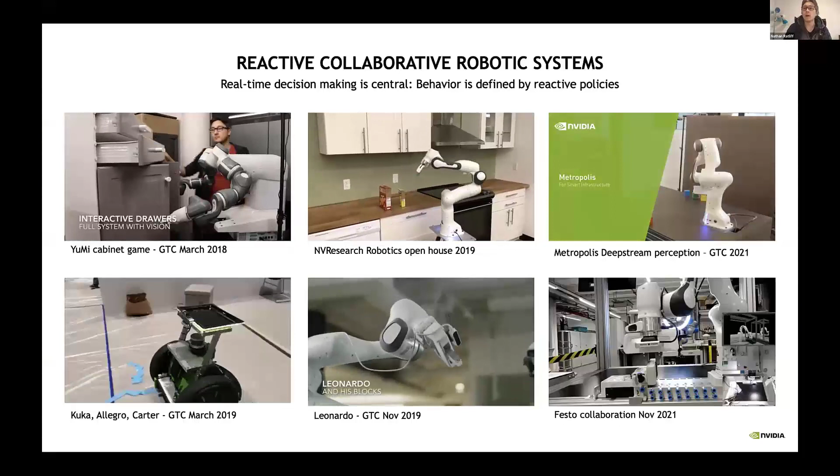Okay, so do you see the panel on the side? Is it blocking the screen? No, it's fine, it's fine. Okay, cool.

Over the past 5 years, I've been at NVIDIA, started off in research, now pushing into the product area of trying to productize some of these things into what we call Isaac Cortex, which is a collaborative robotics framework for developing systems on top of the IsaacSim tools and Omniverse. A lot of this research came from the Seattle Robotics Lab, and we're still continuing to develop it. What you see here is a series of demos that we gave in the collaborative robotics area.

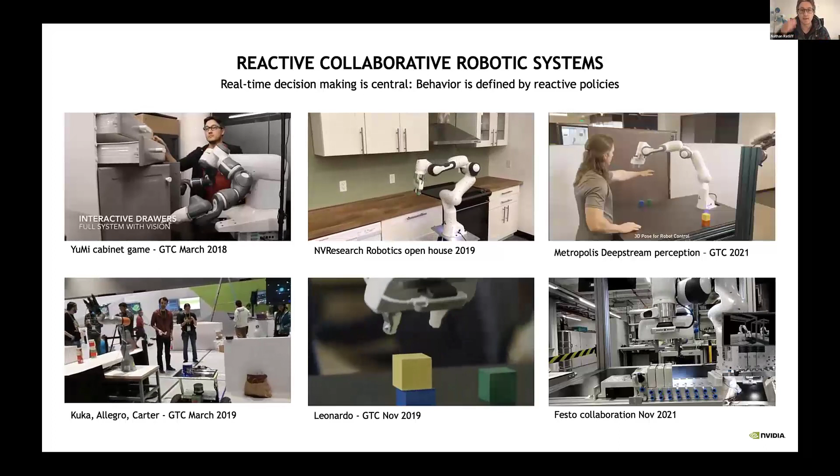Reactivity and real-time processing, reactions, state estimation, adaptation, and stuff like that are all critical because the world is constantly dynamic. Things are happening - even your estimate of the state is changing based on the current changes in the belief and the information that you have. So these systems that we develop are fundamentally reactive.

What I'm going to be talking about today is some of the underlying technology for developing policies for continuous control that are both expressive, programmable, can be trained, and can contain a lot of information. That's the real crux of all of this stuff.

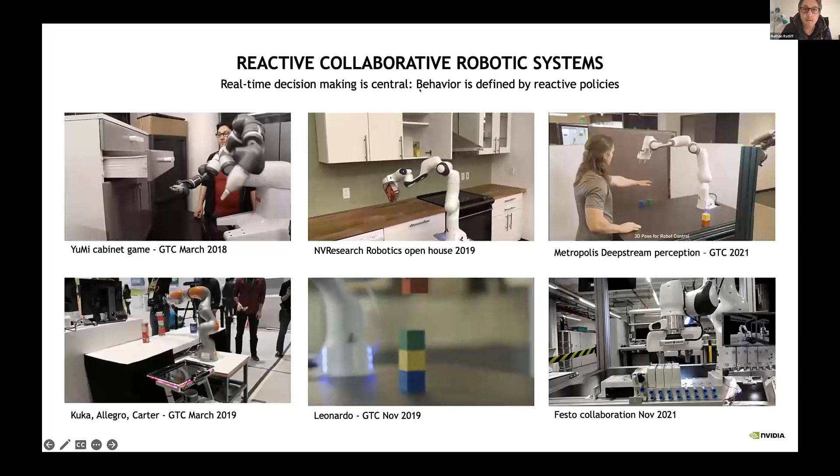One of the perspectives that I've started moving toward over the last year especially has really been shaped by this monograph that Bertsekas put out last year, and I want to point everybody toward it. It's really kind of transformational in the way I think about this stuff theoretically. This monograph is Lessons from AlphaZero.

He looks at the history of dynamic programming and reinforcement learning and what's worked in systems, especially case studies like Tesauro's backgammon program and AlphaZero. What he shows is that these policy iteration algorithms, especially the type that AlphaZero employs, where you do forward search on top of this actor-critic network to create better actions and better value estimates, and then project that data onto a class of actor-critic networks - that's actually running Newton's method on the Bellman equation. This theory spans discrete actions, discrete spaces, and continuous action, continuous spaces, and kind of the entire spectrum of abstract dynamic programming.

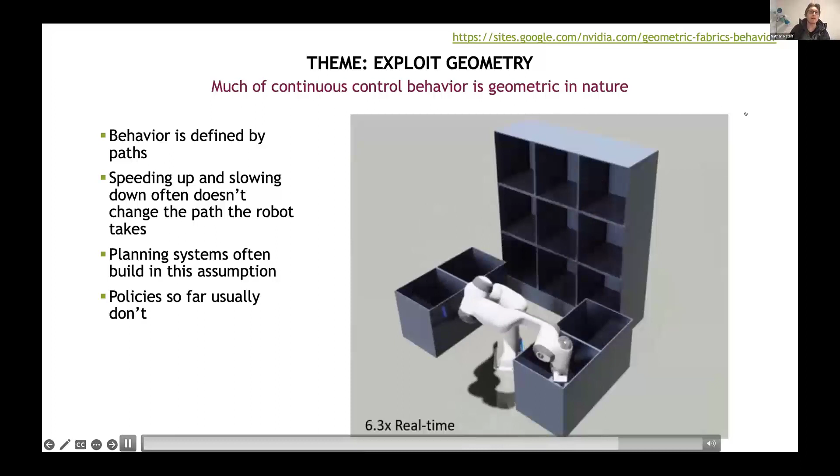The theme is that we're going to exploit geometry, and our hypothesis is really that much of continuous control behavior is actually geometric in nature. From what you see here, you can kind of see what we mean by that.

Moving between these cubbies, it moves between paths that are geometric in the sense that you can speed up and slow down the system, and the basic path that it needs to follow to move around these cubbies and into and out of them shouldn't really change. The behavior of the robot is largely independent of the speed that it's traveling.

So there's this network of paths that's defined by both the robotic structure and the environment around it that really influences the robot's behavior. That's what we're going to be building out and exploiting here.

And that sort of observation has been used quite a bit in planning systems. Most planning systems, if you run an RRT and then smooth it and so on, you often get not a trajectory out, but a path, which is just a series of points that the system has to go through.

Then there's a separate retiming phase where you actually speed it up and slow it down along that direction of motion, along that path, creating a particular velocity profile for following it. But you can choose any sort of velocity profile you want—speed up the robot, slow it down, make sure it doesn't jerk too much. That's independent of the actual path generation problem.

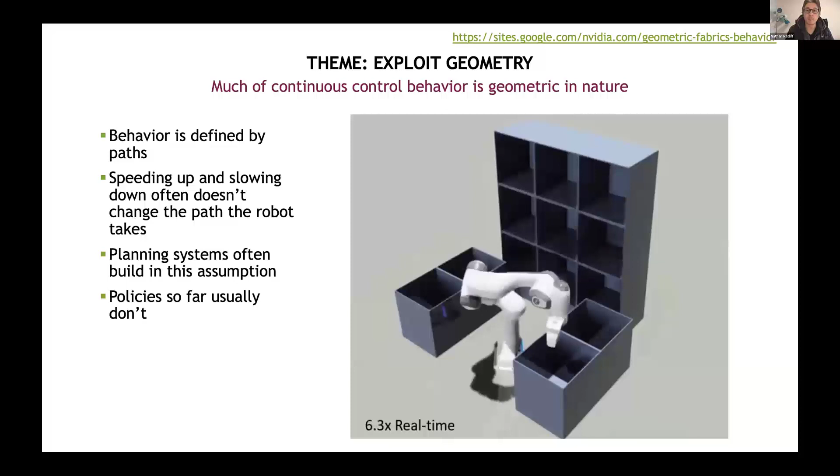So far, planning systems have done that to generate single trajectories or single paths and then turn them into trajectories, but typically policies don't represent their behavior in the same way. You can see from this anecdote of moving between the cubbies that this notion of following paths, and representing behavior as a series of paths affected by the environment and the robot's kinematics and constraints, is something we might be able to exploit as an important inductive bias.

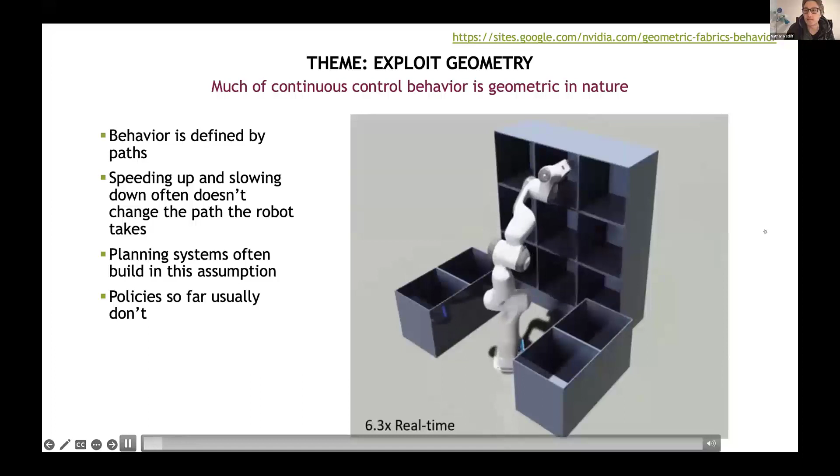So how do I get there? We go. Okay, so that was the little introduction.

The rest of the talk covers three main sections. One is describing geometric fabrics, the structure I've been describing of how we can exploit geometry to represent behavior better. Then I'll talk about particular mathematical tools for exploiting the structure of these things, which play into how we design real-world systems leveraging this theory. Finally, we'll go into what we call neural geometric fabrics, a way of representing geometric fabrics as neural networks, leveraging the inductive bias of geometry and the structural tools from section two to create structured policies that are both flexible in representation and extremely data efficient because they exploit this geometric prior.

One note: some of the stuff here is fairly heavily mathematical, so we have background material you can look at, including lecture notes I made on the geometry of smooth maps, some notes published in ICRA on generalized nonlinear spray geometries of paths, and Finsler geometry that leads to geometries of paths, as well as the geometric fabrics work. I encourage you to take a look at that background material. If you're not following the math right now, just focus on the intuition, which is actually fairly visual and straightforward to follow, I think.

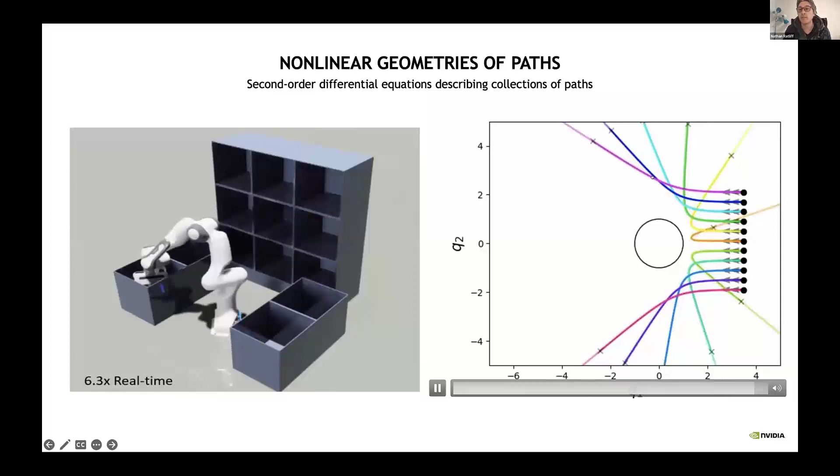And you can see that despite one of them moving more slowly, they both always follow the same path. And so that's the notion of geometry. It's independent of how fast you're going. The path that the system travels along is entirely defined by the initial direction.

And we can get some intuition for what are the requirements on a differential equation to have this property of path consistency by looking at just the nature of finite differencing and how velocities and accelerations differ from each other.

So if we look at a curve here and look at 3 consecutive points and say that they're separated by delta t apart, we can take finite difference estimates of the velocity and acceleration for these things and write out what the equations would be. This is just the finite difference velocity. This is the finite difference acceleration here.

And one thing you notice is that the velocity depends on 1 over delta t, and the acceleration depends on 1 over delta t squared right here. And so we can ask, like, if we speed up the system by scaling the velocity by lambda, how does that affect the acceleration if we want to stay along this path?

We just do a little algebra, move the lambda over to the delta t, or I just combine it with the delta t, and then plug it into the acceleration, and we see that if we scale the velocity by lambda, then the acceleration has to scale by lambda squared in order to stay along the same path.

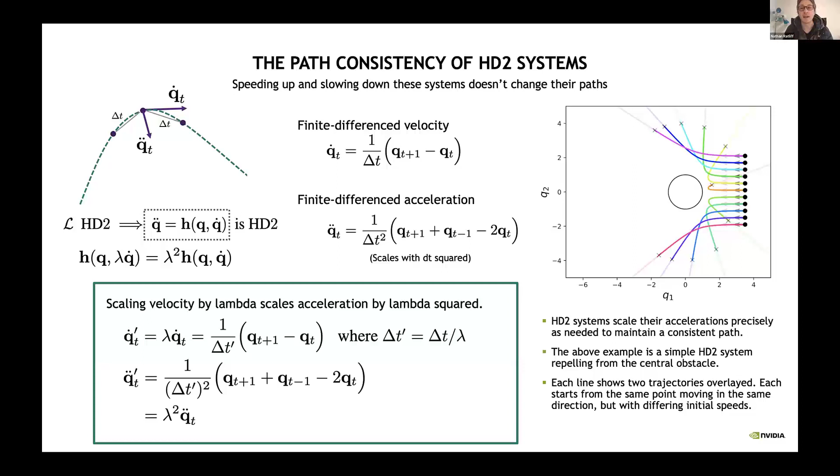And what we'll do is construct differential equations by just giving them this homogeneous degree 2 property and then speeding them up and then slowing them down in the right way to conserve some energy. And that energy conservation thing is what we see here.

Kind of the second part of constructing one of these things is choosing an energy. So here I write Finsler energy, and in the paper we wrote about nonlinear geometry and Finsler geometry, we kind of define what that is. But for these purposes, you can think of it just as like any classical mechanical energy.

That energy comes with its own equations of motion, just like classical mechanical equations of motion are derived from classical kinetic energy, using the Euler-Lagrange equation. So if you start with some energy that you want with a corresponding equation of motion, you can derive specifically how you might speed up and slow down along the direction of motion in order to make this system conserve energy.

We have some theorems and formulas around that, and we call it energization of the system. So if we write down any homogeneous degree 2 differential equation, which has this path consistency property, and then energize the system so that it conserves a measure of energy, what we end up with is this nice differential equation that has the same set of paths, because we're just speeding up and slowing down along the direction of motion, but it has this concrete measure of conserved energy, which means that any system running over the top of this, if it does nothing, is just going to conserve the energy.

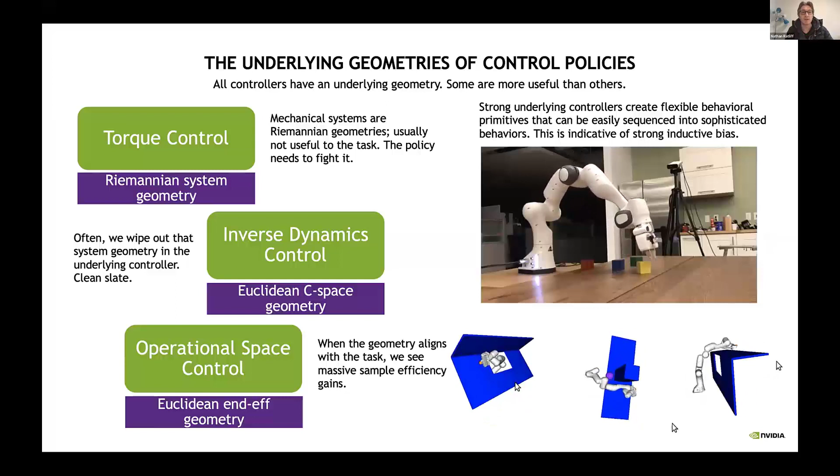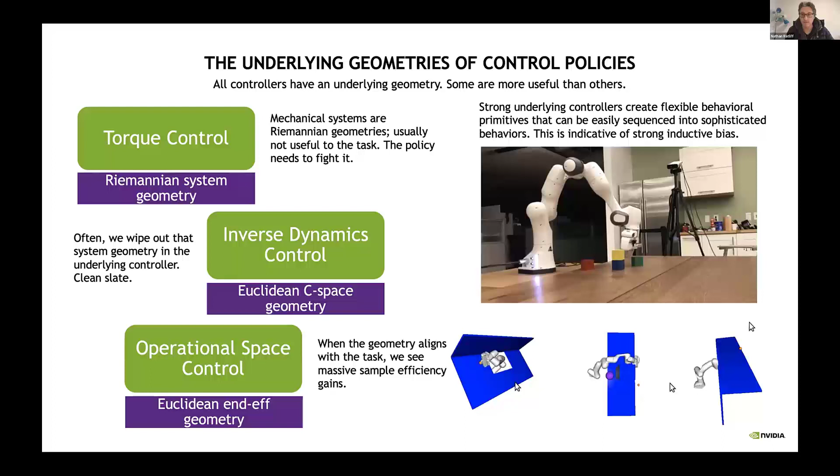On the bottom, you see an optimization system running over the top of some of these geometries, where we literally just optimize a single waypoint that it wants to go through. So we can do these longer horizon planning-based tasks, and the optimization converges really fast. It's stable, and it's able to leverage all of this underlying geometry.

So I mentioned a big part of this is forcing a geometric fabric, building a policy over the top of one of these road networks of paths, so you can actually get the system to accomplish a task. This is just a visualization of that based on the example from before.

What you see here on top is literally the road network of paths that come from the geometry. So here we start from this point, we shoot out a spray of integral curves. These form a series of paths that the system wants to follow that are independent of the speed it follows. They tend to move around obstacles, get attracted toward the point, but they don't slow down the right way. They don't exactly hit the point, they just kind of loop around, because we're just looking at the basic underlying geometry.

The system wants to be attracted to the point, wants to avoid obstacles, but it doesn't really have the goal in mind. By placing a very simple policy over the top of it, which just regulates the speed of the system and nudges it slightly toward the goal, we can corral it very easily to both leverage that geometry and get to the target we want.

And in equations, this looks like this sort of thing.

So we see here, we start off with this path consistent homogeneous of degree 2 differential equation, which is just any differential equation that has that homogeneous of degree 2 property. This speed regulator here is part of the energization process. So we speed it up and slow it down in the right way so it regulates its own energy and maintains constant velocity under some metric of velocity. And we have specific formulas for calculating the alpha for that.

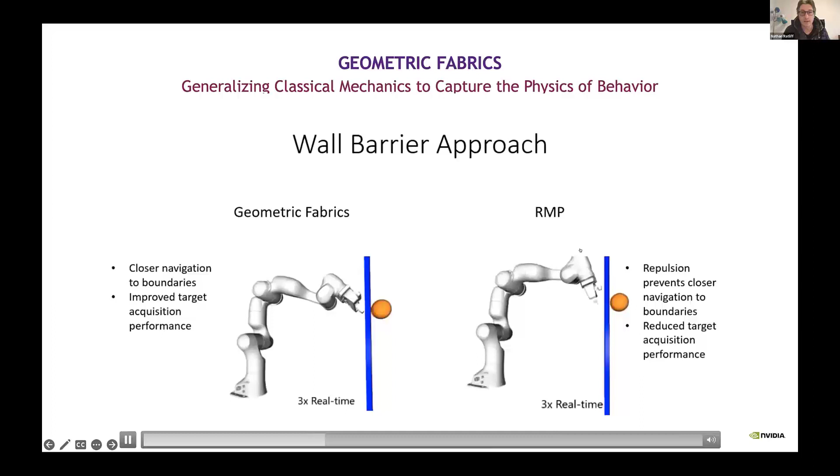We get closer to constraints more easily because we're representing these geometries in a nice way. This one, sorry, that's pretty fast, but you can see it going through. The video is online from that link, but you can see it going through the ring, and there we go.

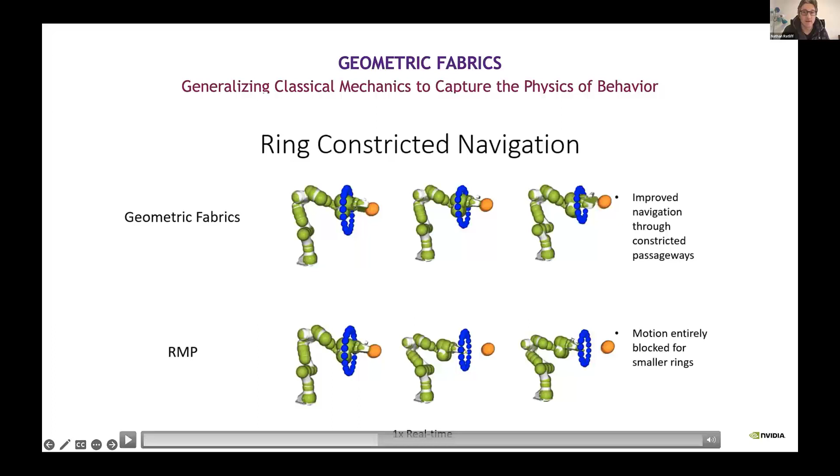Geometric fabrics is able to get through these very tight constrained quarters, but RMPs, which rely more on heuristically defining these differential equations and using potential functions, has to be more conservative because it's not leveraging geometry in a nice way. Here's an example where it's just throwing a bunch of obstacles at the system.

Geometric fabrics does a lot better at navigating all of these obstacles, just kind of slipping around these things and actually getting to a target. Whereas you'll see at various points, RMPs are just getting kind of bogged down by all the constraints in the space.

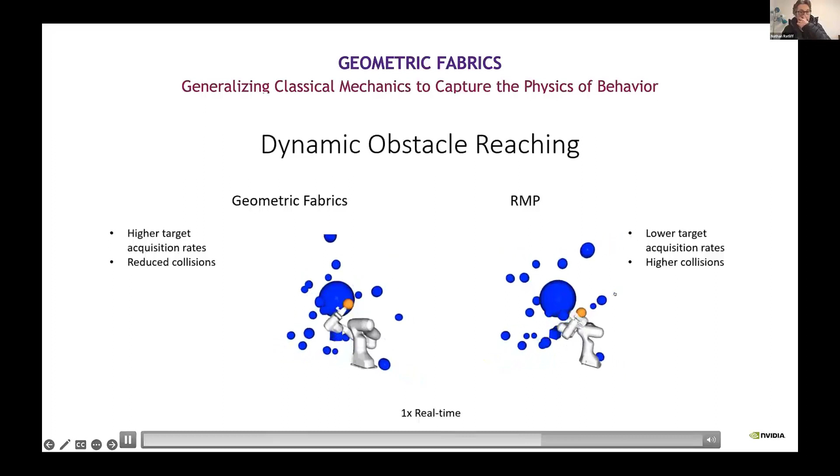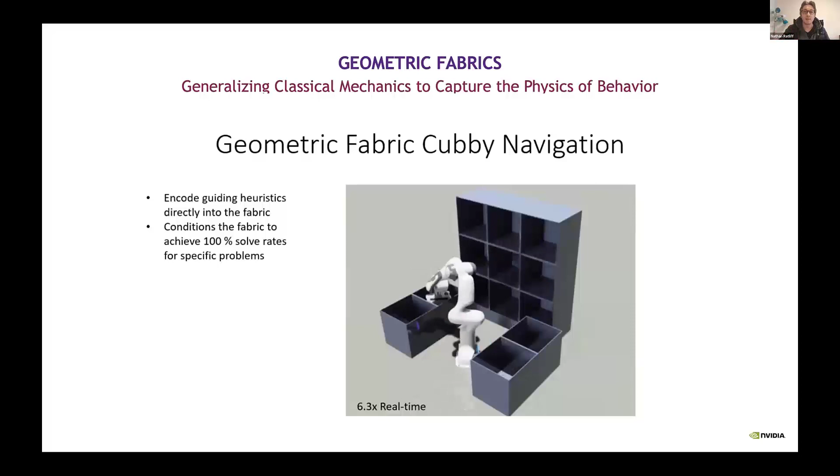And this is just the example I've been showing where what we did here was really write most of the behavior that you see into the geometry of the system, and then just have a very simple driving policy that drives it to the goals.

Okay, so now let's go over a couple structural tools for how to exploit this. Because of the time, I'll go a little bit faster through this material, but there's a lot of papers online that I point to.

So in real-world systems, what I've showed so far is mainly just defining these things in C space and stuff, but real-world systems have a lot of different task spaces which we can try to exploit to capture the structure of the problem. Examples are the locations or poses of the end effector or the different links, distances between those points and points in the space, as well as the distance between the end effector and a goal and things like that. And ideally, in designing systems, we'd exploit all of that structural geometry in a nice way.

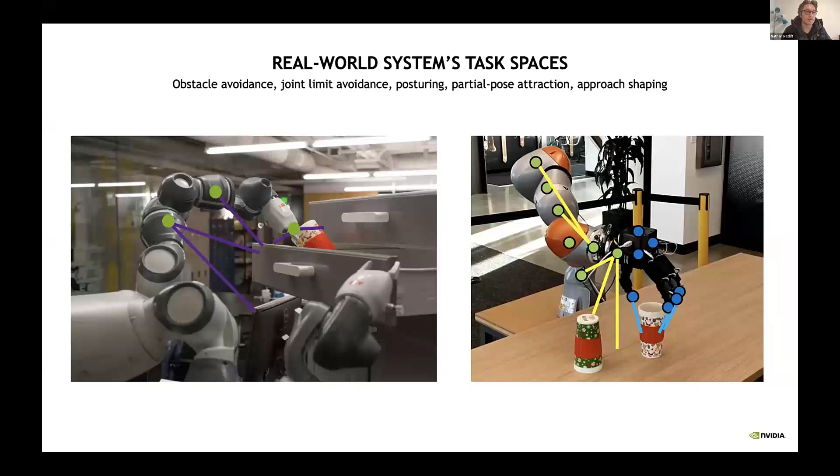And it turns out that there's some nice set of tools for leveraging that within this framework of geometric fabrics. At a high level, we can just think of these different spaces as forming a tree of different spaces linked to their parent via just a differentiable map.

So if we start at the C space Q, there's a differentiable map to, say, the end-effector space, or a differentiable map to a link, and then different differentiable maps from that link to distance spaces to obstacles and stuff. And so we end up with this tree of task spaces.

And construction-wise, how we would construct this sort of differential equation is we would place little pieces of the differential equation at each one of these spaces, and then do a series of operations to transform them back to the root. And so these little pieces of the differential equations are called what we call specs, short for spectral semi-sprays.

And they live in each one of these spaces, and they themselves represent a little differential equation of this form. So far, I've really been describing just differential equations that are like acceleration equals some function of position and velocity.

But it's important to represent them here in this form where we actually pull out this system matrix. And you can think of this as entirely analogous to classical mechanics, where you have this equation of motion. You can solve for what the acceleration is, and you can see what the integral curves are from that. But it's important to keep them in this form here so that we can explicitly look at what the mass of the system is and what forces are being placed on the system.

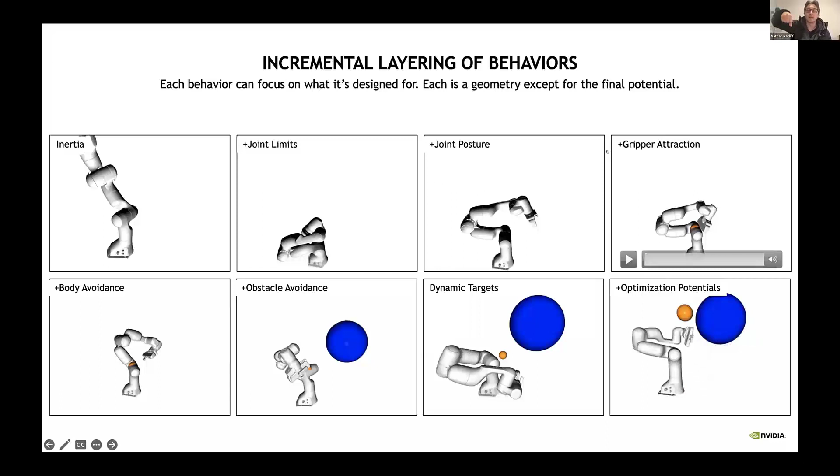And the final version, we add the potential, which can regulate the energy, speed it up and slow it down. We get this very nice behavior around the obstacle. And you notice as it moves around the obstacle, because of the joint posture, it keeps moving back toward a good null space pose. So it can run like this forever.

And here's an example comparing RMPs on the right, our previous version of this, to geometric fabrics. We can see that geometric fabrics are just much more snappy and well-behaved.

I'm going to skip this one in lieu of time, but these are some videos showing the interactions with classical mechanical systems. I encourage you guys to take a look at this paper, which shows that geometric fabrics are actually just a very natural generalization of classical mechanical systems. We actually develop simulators that integrate classical mechanics into the geometric fabrics and can have interactions with it.

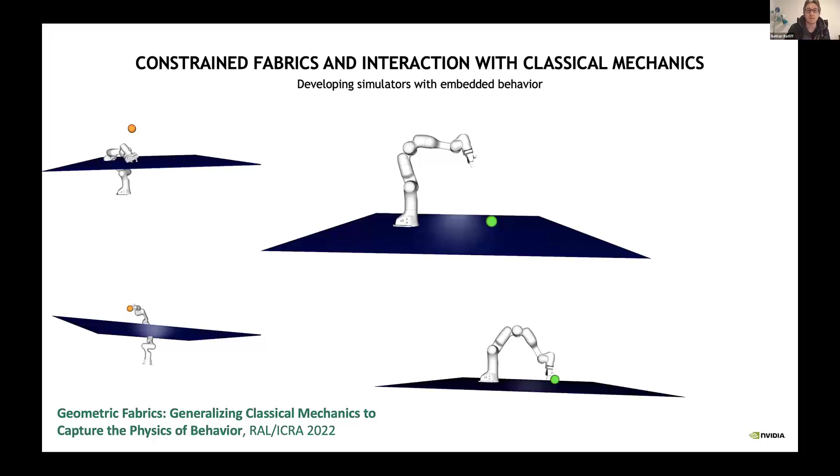Okay, really quickly, I want to go over these neural geometric fabric results. You can think of this as a trainable version of geometric fabrics, which connects us back to what I talked about in the beginning, where we want to exploit this structure, but do so in order to encode information into it as effectively as possible.

So we ran some experiments with a trainable version of these things, where we gathered data using this DexPilot system, which is a teleoperation system where we can do very dexterous manipulation based on remapping human hands to the dexterous hand.

We collected a relatively small amount of data, 80 C-space demonstrations in this case, which are entire trajectories, and compared the sample efficiencies of a number of variants of these algorithms, including a couple of variants of neural geometric fabrics, RMPs, the Riemannian motion policies, the previous version of this stuff, LSTMs, which are pretty standard in the literature, and generic neural networks.

And what we see consistently is that geometric fabrics constitute a very well-informed but flexible inductive bias for continuous control. And so these things are able to learn complex policies from a very small amount of data.

The problems that we look at are picking up a sugar box, and this interesting problem where we have to touch a point on the table and then move around a can and push the can over to that target. The location of the can and the location of the target change over time between different runs. And then another one where we extract a tool tray from this toolbox.

I think the best way to see that is in the connections here with classical mechanics in this paper. What we find is that all of this stuff is about adding together different pieces of systems. And if one of those pieces is literally the classical mechanics of the robot, then what the classical mechanics want to do, including in the underactuated degrees of freedom, gets averaged into the differential equation.

So we can put those together, we can derive some results in terms of what that looks like in the underactuated space and try to parameterize that. We haven't pushed too hard into that direction, but this paper here kind of fleshes out the theory behind it.

Okay, thank you. Will some of these tools be available in NVIDIA Isaac? Is it in Cortex, in Isaac, in Orbit? Where can we find this to try it?

Yeah, we're putting together some tools, especially around the neural geometric fabrics and vectorized versions of these things right now, and hopefully with the next release we'll try to get those things out. That specific deadline or date is flexible because it depends on how well we're able to flesh it out. But we are putting together some of these things so we can actually try it out.

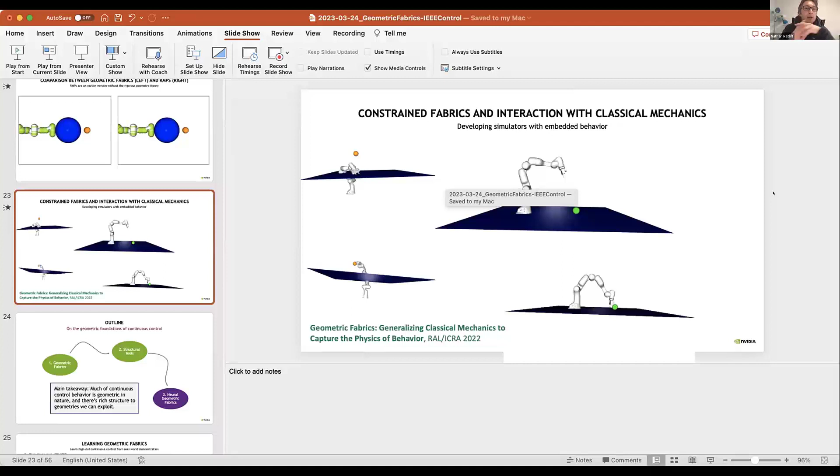Yeah, it's all about multiple geometries combined. Typically, we don't resolve the differential equation until the very end. So if we look at something like this, the spec is defined in terms of not h, which is the inverted or resolved acceleration, but the forcing term. We can have little pieces of the differential equation in lower dimensional spaces, and when they get pulled back, they're reduced rank, but then they're summed together, and so the resultant system has full rank, and then we can fully resolve that and get the underlying differential equation.

And if we don't have full rank in that final thing, the system is under constrained, and there's a question of what it should do in that null space. Ideally you would have a full rank system at that point, and we usually get that by adding some kind of underlying C-space term that's almost like a diagonal damping matrix in the linear system. Or you can just choose what to do with the null space, like getting rid of it. But in all our cases, we try to make sure the final system is full rank, so everything is specified.